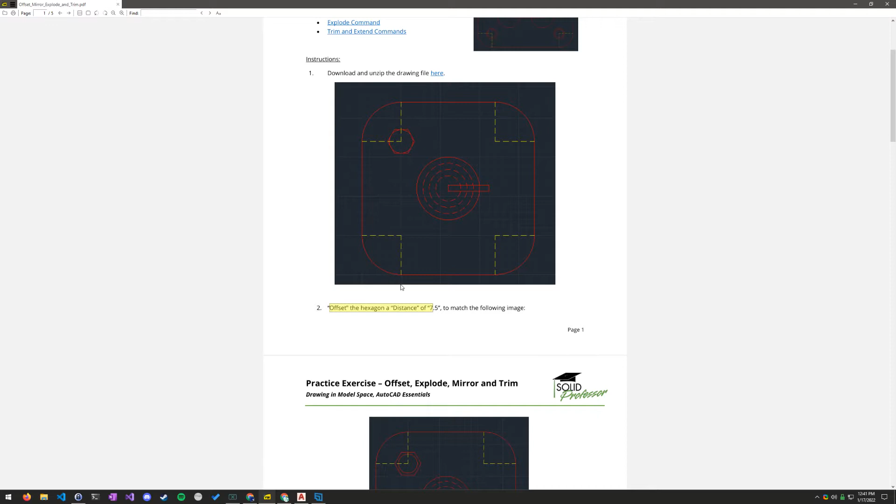Once you've got the file loaded up, let's look for the first instruction. The first instruction is to offset the hexagon in the top left corner a distance of 7.5 to match the following image. We're just growing this hexagon, which represents a bolt, by a distance of 7.5.

So I'm going to go back to AutoCAD. It mentioned the offset tool, and that's exactly what it does. It grows or shrinks a particular set of geometry. Don't get it confused with scale. Scale will grow or shrink geometry but tries to keep everything intact, whereas offset grows or shrinks it in a smart way, sort of. That's hard for me to put into words, so I'll show that off in class another day.

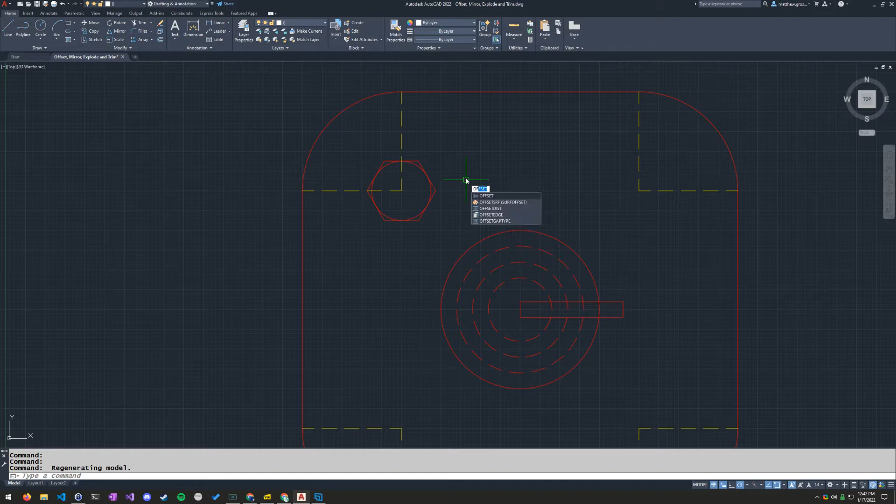For now, let's just follow along. I'm going to go into the offset tool, which is just OF, enter. It says to specify a distance. Through is the default, but I want a specific number, so I'm going to type 7.5 like it said in the instructions and press enter.

It says to select the object we want to offset, so of course that was the hexagon. I'm going to hold my mouse over it and click. I can offset it 7.5 growing or 7.5 shrinking. Now I want 7.5 growing, so I'm going to move my mouse and keep it to the outside of the hexagon, then click.

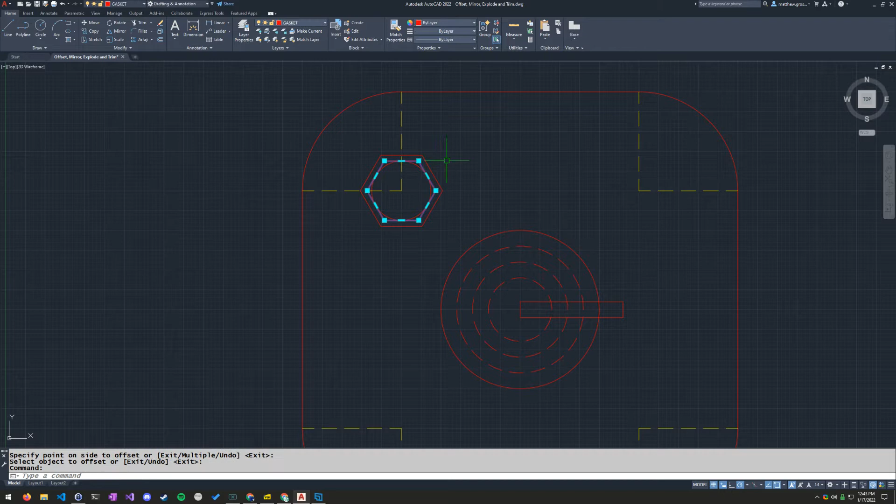Don't press enter there or nothing's going to happen — you have to click. I know it seems weird, but it is what it is. Once you're done offsetting, you can go ahead and press enter to exit the tool. And we're going to select the old hexagon and delete it.

Back to our instructions. We're going to mirror the bolt object to match the image below. We're basically copying the hexagon and the circle that makes up that bolt shape and copying it over to the bottom left corner. We could do a copy and paste, but we're going to do mirror because sometimes that's better for more complicated geometry.

So I'm going to select my two objects here, type in MI for mirror, and press enter. Now it says specify the first point of the mirror line. We want to swing this around the halfway point of this shape, so my first point is going to be this midpoint on the left here. I'm going to click that, and as I swing around to the next midpoint on the shape, it puts it right perfectly into place.

So I clicked on the midpoint here, then I swing my mouse over and click on this midpoint to the right. And when I click, it asks, do I want to erase the source object? The answer is no. One thing you might have noticed — I'm going to undo that — is that I selected the objects first and then did mirror.

You can do the opposite. I can type in MI for mirror, then AutoCAD is going to ask me to select objects since I had nothing selected before I went into the mirror tool. So if I go ahead and select those objects now, I have to press enter to move the tool along.

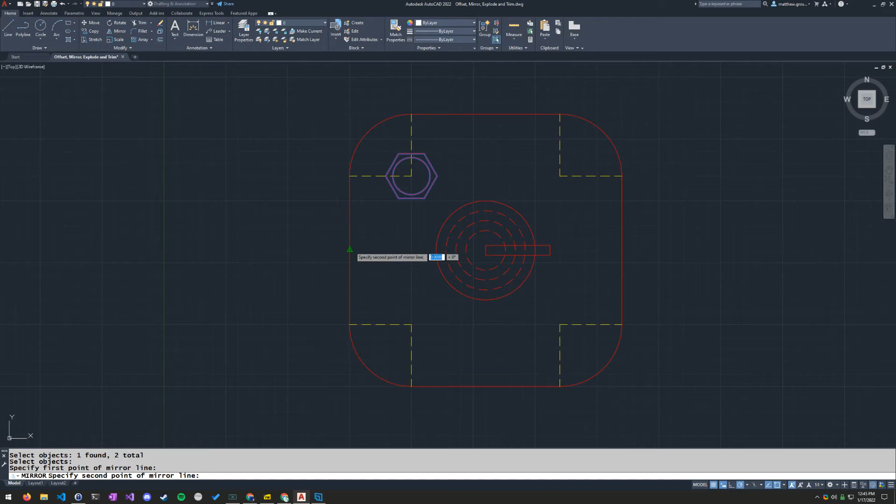And then it's the same thing: select the first point of the mirror line, select the second point of the mirror line, erase the source objects — no. And now our bolts have been mirrored. So I go back to the instructions.

Mirror the objects with a base point of 800/775 to match the following image. So now we're going to mirror this whole thing along the base point 800/775. That's important — you have to know where you're going to mirror from here because it's not as obvious as the last one.

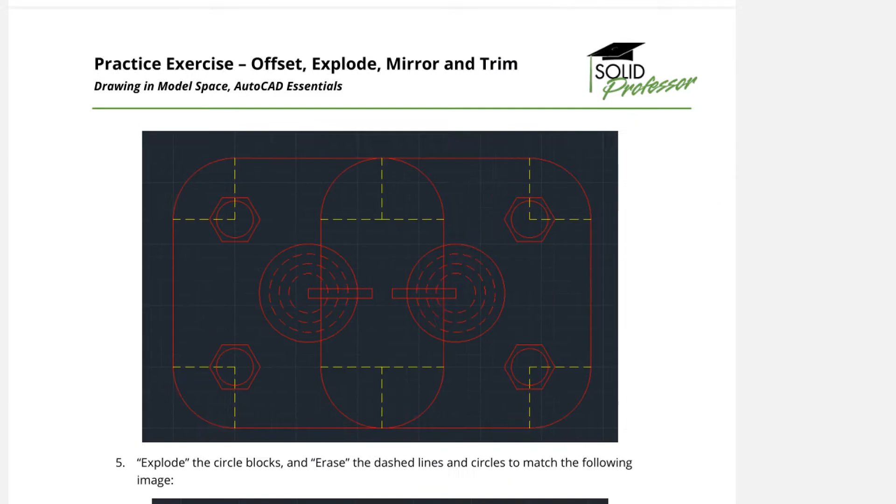We're going to go ahead and do that so we match what this image looks like. When mirroring something this complicated, we want a visual sort of base point to focus on. So I'm going to look for this pill-shaped oval in the middle to see if I've done this correctly.

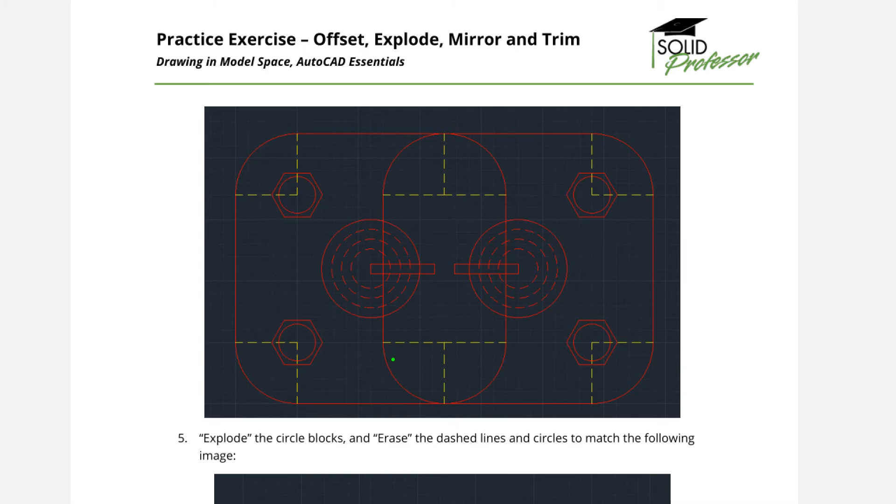So I'm going to go back to AutoCAD, do MI for mirror, enter, and select everything.

All right, press enter to move the tool along and go to 800, 775, enter. Sure enough, if I do that and hover my mouse, tracking straight up, I see that pill shape I was looking for. So I know that this is accurate.

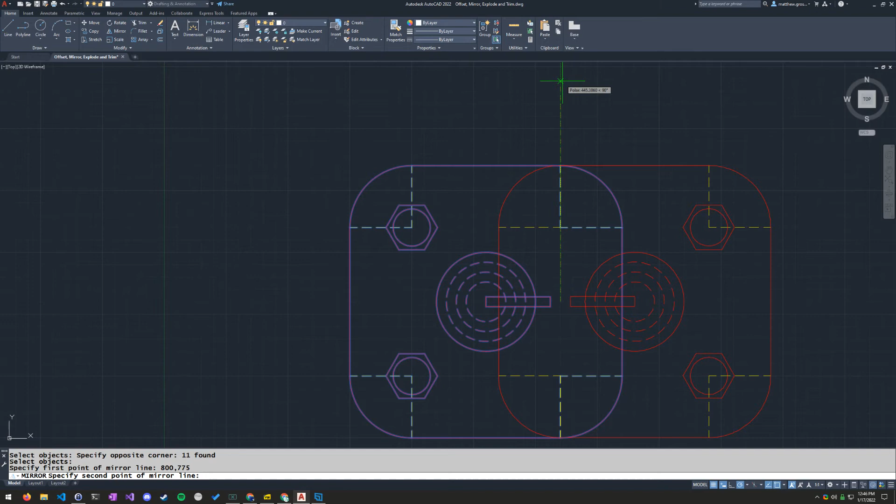I'm going to click here. Now that I know I've got that correct, erase the source objects—no, we want to keep everything. This looks pretty good, this matches the instructions, so we're on the right track.

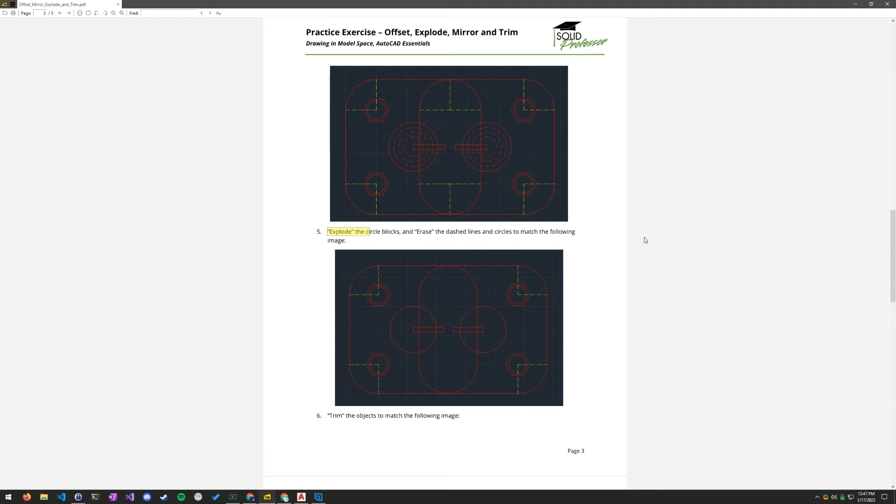Now we're going to use the explode command on the circle blocks to erase the dashed lines and circles to match the following image. If you look closely, we're basically deleting these dashed lines. It says to use the explode command because notice when I hover my mouse over one of these circle blocks, all the circles highlight, all the dashed lines and the solid circle on the outside highlight together. They're one unit. The explode command breaks all of those apart into separate units.

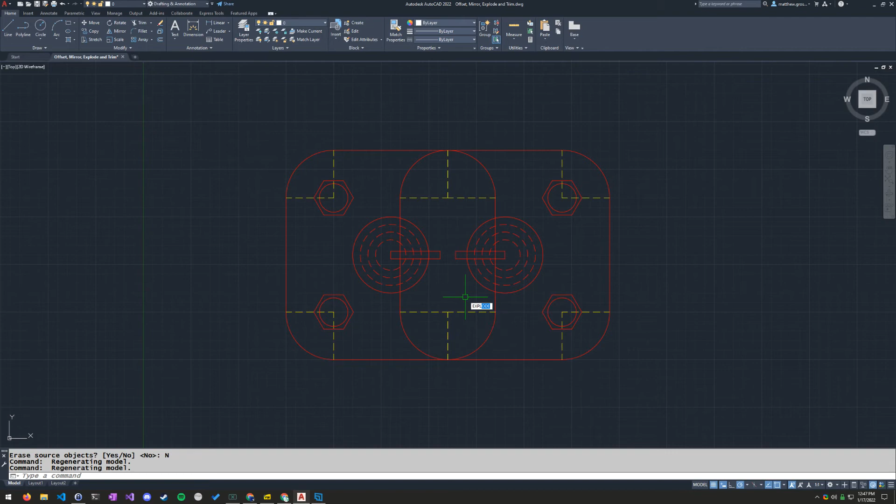So I'm going to do EXPL for explode, enter. Select objects—I'm going to select the two circle blocks. Now that they're both selected, I'll press enter, and now they're exploded. Notice how if I hover my mouse over any one of these lines, they're all separate.

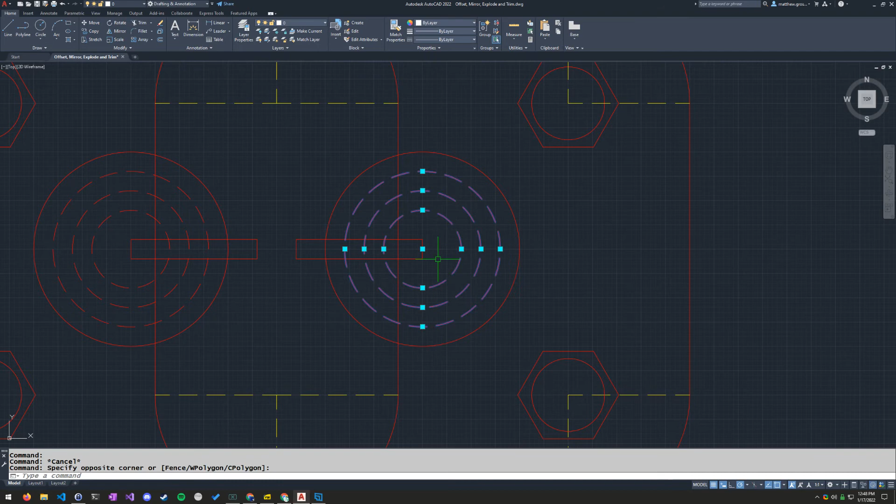So it wants us to delete those dashed lines. I'll select all of those and delete them. Let's see how we did, comparing that to our image here. We're looking pretty good—oh actually, I'm noticing there's a couple more things that need to be deleted.

It looks like the yellow dotted lines need to be deleted as well, so I'm going to work on that next. Delete those. Delete those. Anything else I might be missing? That pretty much looks like it.

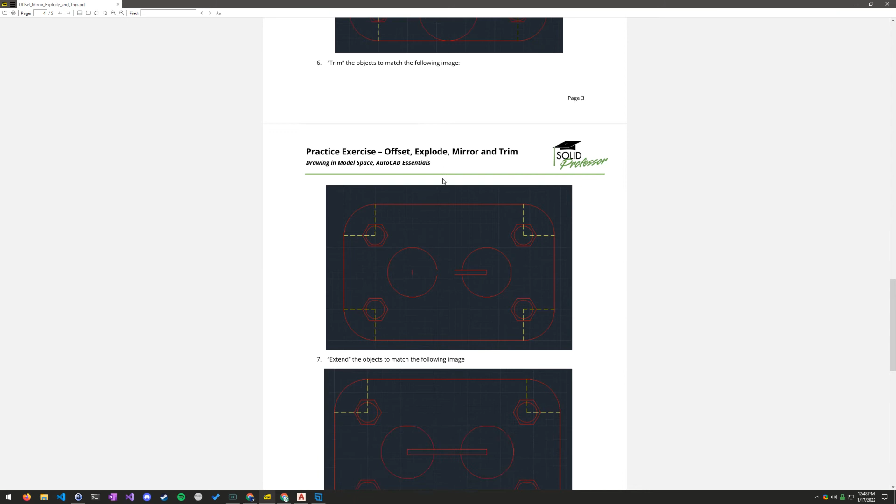So now we're going to trim the objects to match the following image. We're going to trim and extend—trimming out everything we don't want, and then extending these two rectangles here, because they stopped with a gap in the middle and they just want us to connect those two together. So we'll go ahead and do that now.

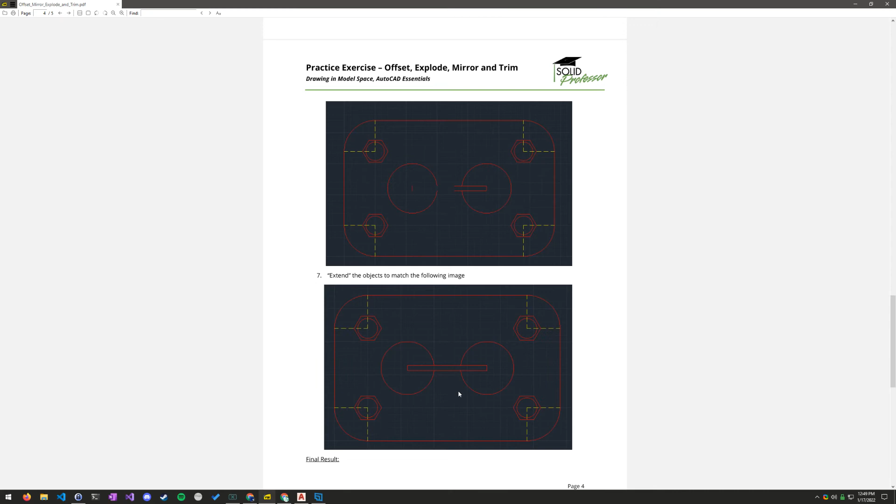Trim and extend command, so TR enter for trim. We're just going to get rid of all the other stuff they didn't want, which is this sort of oval pill shape. Go ahead and get rid of that. They don't want these little lines inside the rectangle, they don't want these little lines where the rectangles are going to meet, and they don't want the circle there.

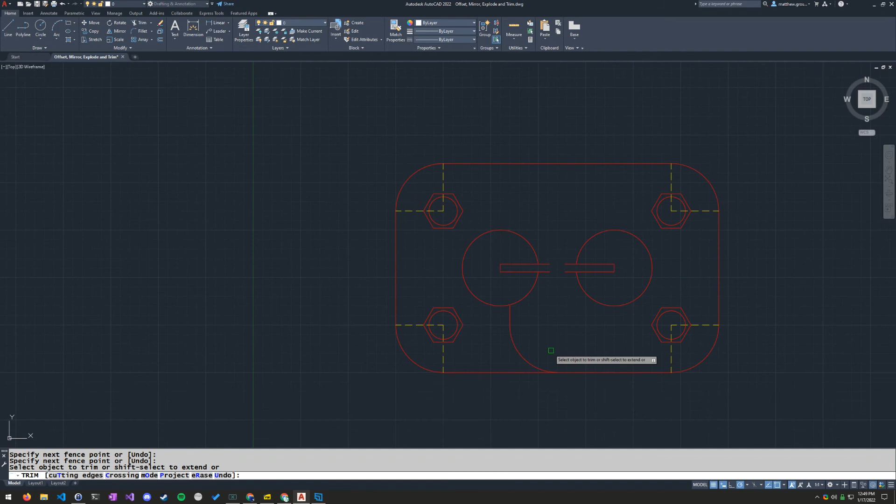At least I don't think so—let me make sure. Yeah, they don't want the circle there, and the rest of the pill-ovally shape there should be gone as well. All right, so now that I'm at this point...

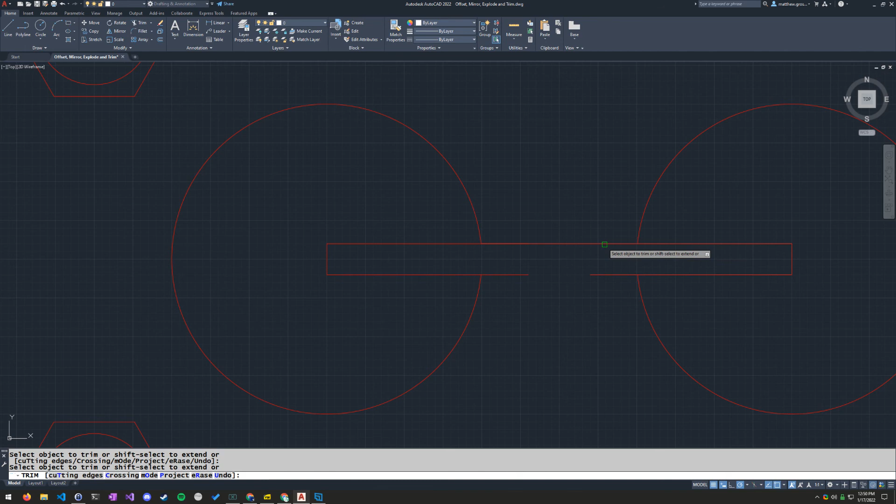I'm going to hold the shift key to enable extend. Trim is its own command, and extend is its own command—they are separate commands, but AutoCAD understands that trim and extend are so closely related that they don't want you to have to escape the trim command and go into the extend command. So if you hold shift, you can select a line and it'll extend instead of trim. I'm going to do that now.

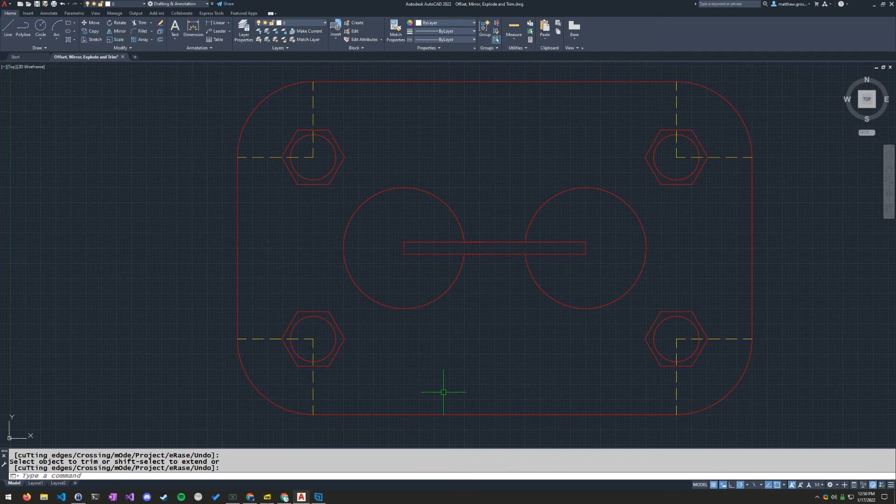And as you can see, I've successfully extended those lines so that they all connect. All right, that looks pretty good. I'm going to press enter to escape the trim and extend command, and go back to the image to make sure we've got everything.

If you completed the exercise successfully, it should look like this. Mine does. They don't want us to erase those yellow dotted lines, the yellow dashed lines on the outside, so everything looks good here.